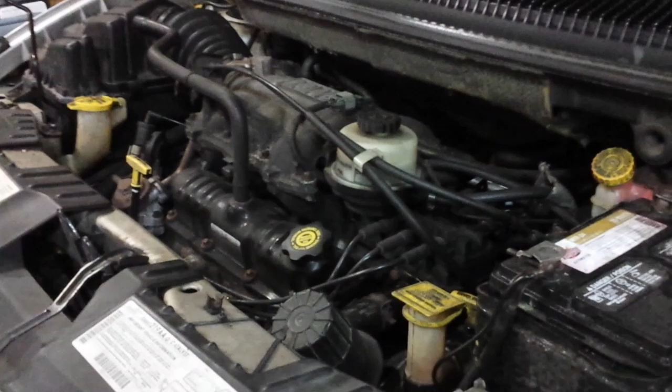Okay, so I'm having an issue with our '01 Dodge Grand Caravan, and what's going on is that there's a crank but no start, but also at the same time, when cranking, there's this noise which I'm going to go ahead and show you and let you hear what that noise is. And as of right now, I have no clue what it is.

I thought it was a starter when I used my wireless chassis ear and I put one of my sensors on the starter, and that's where I heard the noise coming from. Well, when I bought a new starter from AutoZone and put the new starter in, guess what? It's making the same noise.

So far, I've been able to verify that my first thought was maybe the flexplate might be damaged, but I checked that and didn't see any missing teeth or anything, but I'm going to recheck that again. It did rotate when I cranked the engine, so the flexplate was turning. I also verified that the drive belt, also known as the serpentine belt, was turning as well.

So what I'm going to do today is hook up my scan tool, see if there are any codes, because I believe I have two issues: the noise and the no start, the crank with no start. I'm trying to verify the noise first. That's my goal, and I may need you guys' help with this, because if I can't figure this out, maybe you guys would be able to point me in the right direction as far as what's going on. So yeah, I'm gonna hook up my scan tool, see if there are any codes.

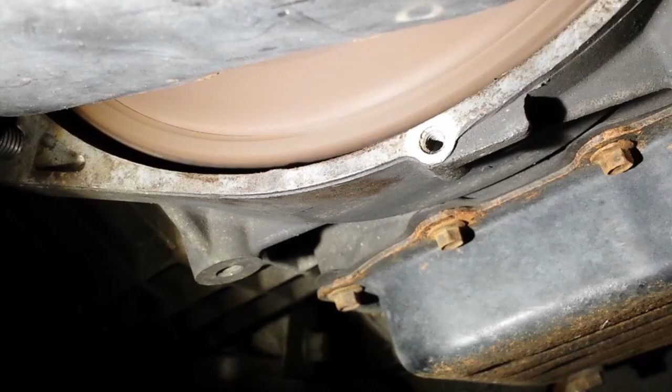Okay, so what I'm going to be doing today is I'm going to take the serpentine belt off, spin all the pulleys, see if I hear any noise from that. Then I'm also going to crank the engine manually and see if I hear any kind of noise while I'm rotating it.

Plans fail for lack of counsel, but with many advisors they succeed. Proverbs chapter 15, verse 22.

Okay, so I hooked up my scan tool and there were no codes. I took off the serpentine belt, which you can see here, and I spun all the pulleys and I didn't hear anything. All of them moved smooth and everything like that.

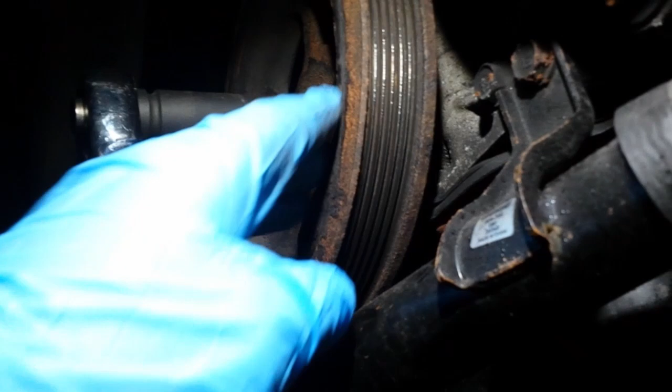But listen to this. So as you can see, I have my ratchet on the harmonic balancer bolt here. I was rotating the engine, just trying to see if I heard anything. So listen to this. Hear that? That's the chain. That is actually the chain. And I don't believe it should be sounding like that.

Listen to that. Hear that? I honestly believe I have an issue with the chain.

I mean, yeah, it's moving and everything, but the camshaft above, right, up there on the top part of the engine where the lifters are, it sounds like, see, listen to that. I think what I'm going to do is remove the oil pan, take that down, because I'll be able to see the chain from underneath there, just to verify, because that just doesn't sound right to me.

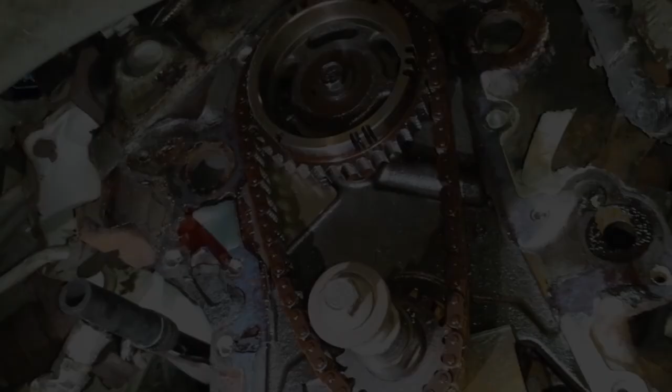Okay, so I got the timing cover off, and I confirmed that, yeah, the timing chain is stretched. Let me show you how stretched it is. Look at that. This is like almost a couple inches.

Look at that. Okay, so what was going on is that the crankshaft gear here would turn, but because there was so much slack on the chain, look, it's like that. This side is just as bad. It's not as bad, but this side is like terrible.

And I was able to confirm that by taking off the oil pan. Sorry, I was trying to film it, and then my battery ran out on my phone, so I didn't get a chance to finish filming it. So let me show you. What I did was I put the crankshaft bolt back in, and I'm going to show you what it was doing.

So you see that? Look, it's turning, but look at what it's doing. The chain, all it's doing is just going over the camshaft gear. So I believe this is what my problem was. Because the camshaft gear wasn't turning, the camshaft sensor wasn't picking up the engine rotation, and therefore it wouldn't allow the engine to start.

Now, I'm not quite sure about the noise, but this is definitely an issue here. So look at that. I'm going to go ahead and take this off, just to give you a closer look. I even saw, if you look at the teeth on there, you can see marks from the chain.

Now that could have been because when I was trying to start it, the camshaft gear wasn't turning. But I believe this has been going on for quite some time, and I kind of ignored the small signs of it, and then had this failure. What I mean is I saw metal pieces a couple times within the last year when I changed the oil, just a little bit. I was like, okay, maybe it's from somewhere in the engine, or it was already in the pan before I started draining the oil. I really didn't see it much after that.

But let me tell you, when I took the oil pan off, and the dipstick, the oil pan pickup tube, it actually had metal stuck into it, which I'm thankful there was a screen on there. I'll show it to you. It prevented all of that metal, because these were some chunks, from going around into the engine.

So yeah, I'm going to go ahead and change this out now. Compare the chain - this is an aftermarket chain, by the way, not the OEM chain. I changed this back in, I think it was 2015, and at that time it was about 170 some thousand miles on her.

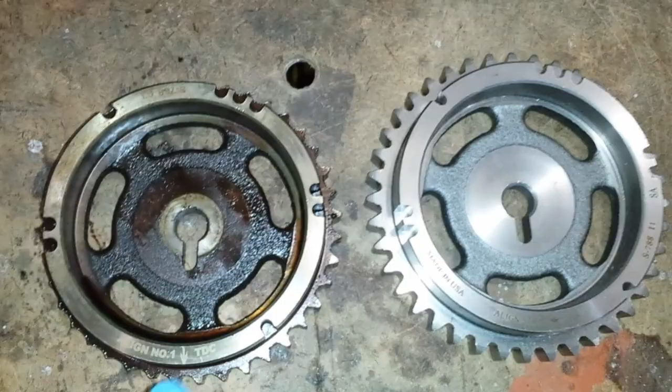So here are the camshaft gears, and you can see the difference between the two. Look at this one on top - look at how worn down the teeth are on there. Look at that. Yep, look at that. Let me see if I can get it better.

Like I said, I don't know if this worn down over time or if it happened when I was trying to start the engine, because what happened was the camshaft sensor didn't sense the camshaft turning, so it wouldn't start. But you could see, look at the way the teeth are - look at that. These are fine here, but again, I'm thinking that maybe this was the bottom where the chain wasn't on once it stopped. But I believe these teeth up here, these were wearing down, and then with the chain being stretched, it just wasn't tight enough - it was too loose. And then this is the new one.

Another thing I noticed is that this one says made in the USA right here - you probably can't see it because of my flash. This one doesn't have made in the USA on it. So I don't know if this particular metal for this was not as good.

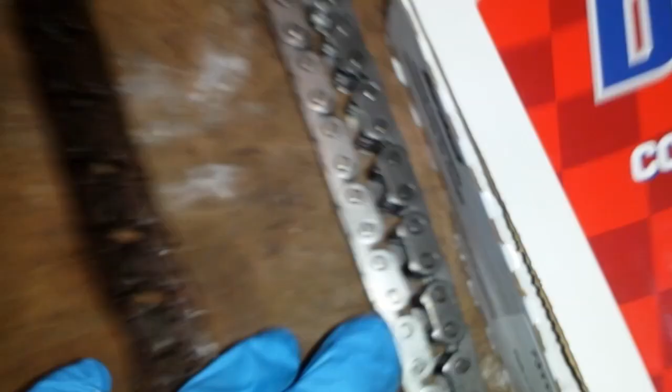The chain says it's made in the USA, and this is the new chain. As you can see, I tried to line both of them up together. It doesn't look like - they look almost the same size and length, but I'll know once I put it on.

But I believe that really the issue is the teeth on the gear. Okay, so this is the part number - got it from AutoZone, that's the part number there. And it comes with everything: the crankshaft gear, the camshaft gear, the timing chain, and also the gasket, the camshaft gasket as well.

All right, so I got the new timing chain on. Just wanted to show you this. Look at that, hardly any slack in there.

Make sure that you line up the camshaft gear, there's the arrow there, and the crankshaft gear as well. Make sure you line those both up. This one should be at 12 o'clock, and this one's at 6 o'clock. And then also there's a spot on the chain where the links are a little different, so this one here and then this one here. You'll know how to line it up because you see there's a little notch there, and there's one up there.

All right, so I'm gonna just go ahead and put everything back together and test everything out.

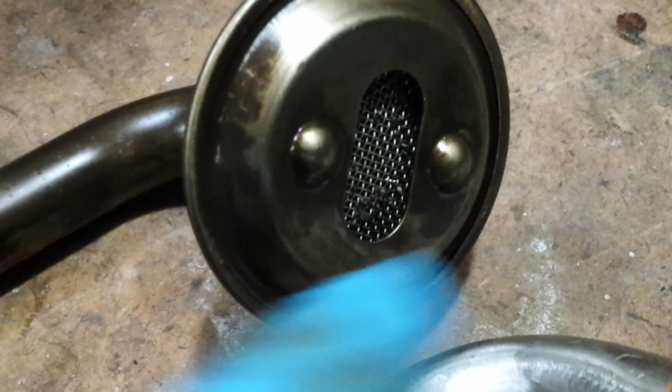Okay, so I went ahead and removed the oil pan pickup tube, this is the old one obviously, and if you look right down in there, you can see pieces of metal that are stuck in the actual screen here, and actually it was a lot more than this. So instead of, I tried to flush it out through this end here, as well as this end, with compressed air as well as brake fluid, and it got most of it out, but I'm still not comfortable with this. So I went ahead and just ordered a brand new one here.

Okay, as you can see, this is how the screen is supposed to look, and this is an OEM part. You can't really see the part number, but as you can see here, this is it. So I'm going to go ahead and install this new one here, and then let me just show you the inside of the engine from underneath.

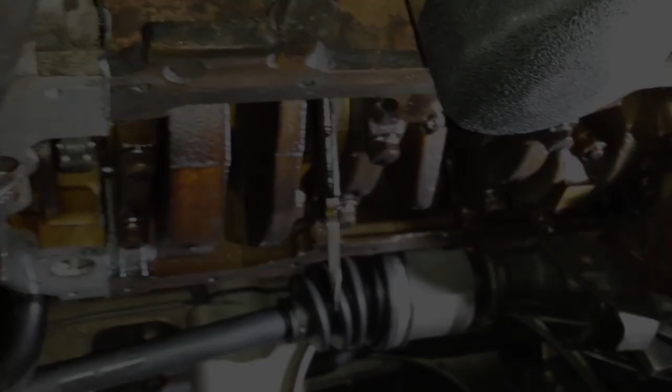Okay, so I'm facing the rear of the vehicle, and check it out, as you can see there's a timing chain, there's a new one that I just put on. So if you ever need to verify again if this is loose or not, just remove the oil pan. That is the simplest and easiest thing that you can do, because that only takes maybe 30 minutes or so compared to taking everything off, the timing chain cover and everything attached to it, to verify that, because you can see all the way up in there on both sides, and you can check it with a long screwdriver as far as if it's loose or not.

But yeah, so this is what our engine looks like at over 300,000 miles. There's some varnish on there and everything, but outside of that, to me it looks really good. You guys can comment and let me know what you think. But yeah, it looks really good. Like I said, we've been running fully synthetic oil since 171,000 miles and everything. So yeah, I just wanted to kind of show this to you.

So I'm going to go ahead. I've already cleaned the surface here on the engine block as well as the oil pan itself. I'm going to go ahead and install it, and then I'm going to go ahead and see if that fixed my problem.

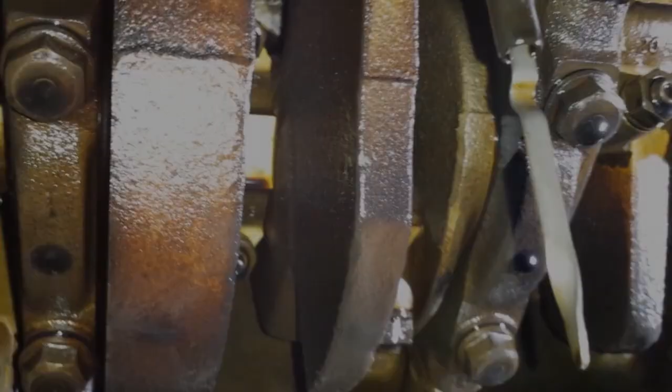Alright, so here's an update. The noise is still there. As a matter of fact, the symptoms have not changed, even with doing all of that work, which is really kind of blowing my mind. I really am clueless as to what is causing the problem. I'm just kind of dumbfounded. So what I'm gonna do is I'm gonna just do a few tests, little simple tests.

I did this before, but I'm gonna do it again. So I've got my battery tester here, let me see if you could see it there. So I'm gonna go ahead and show you the charge on the battery. Now, I did do the... what was I about to say? Oh, I lost my train of thought. Okay, well, I'm gonna go ahead and do this.

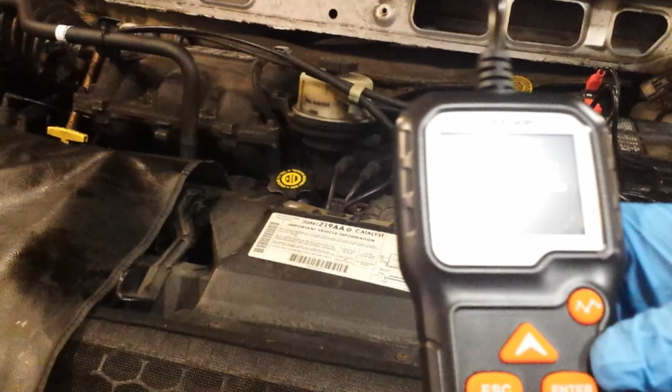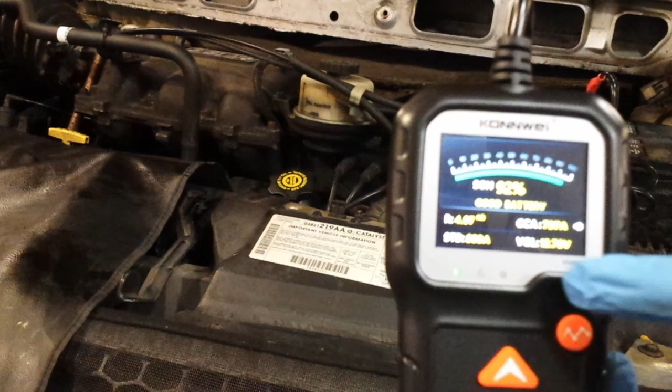Oh, I charged the battery. I had charged it before I did my work, after I was finished with all the repairs, before I tried to start it up and everything. So the battery, I think it was about 12.7 volts or something like that, which isn't an issue or a problem or anything. But I did crank it over like 4 times, so the battery may have gone down some. Not necessarily to the point whereas it shouldn't start, but I just want to test it anyway. Okay, so yeah, as you can see here, it's got 12.7 volts. The cold cranking amp is 737 amps, and it's at 92%. So the battery is actually good.

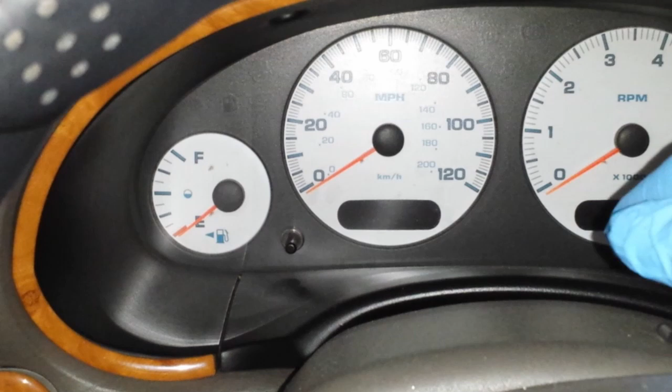Okay, so now I'm going to crank her over. I'm doing 2 things with this. One, I want you to see the RPM while I'm cranking the engine. The RPMs are actually moving, which I believe indicates the camshaft sensor is working and the camshaft is rotating. But also listen to the fuel pump prime, which you may not hear on the video. So I'm going to do that first. Okay, so I heard it prime.

This code here, this is the only code that popped up, and basically that's just that the battery was unplugged. So observe. So you see it? And you probably heard it too.

Okay, so what I'm going to do is test for fuel pressure, as well as test for, what else was I going to test for? Oh yeah, and I'm going to test for spark. All right, so I got everything all set up. Got my fuel pressure gauge set here. The specs for the fuel pressure should be around 49 psi, and then I have my spark plug right here. I'm not sure if you're going to be able to see it. I clipped it over here because I didn't want it falling over or landing on the engine, since it can cause a fire, and also because the spark can ignite something. So I'm going to crank the engine over and see what the readings are.

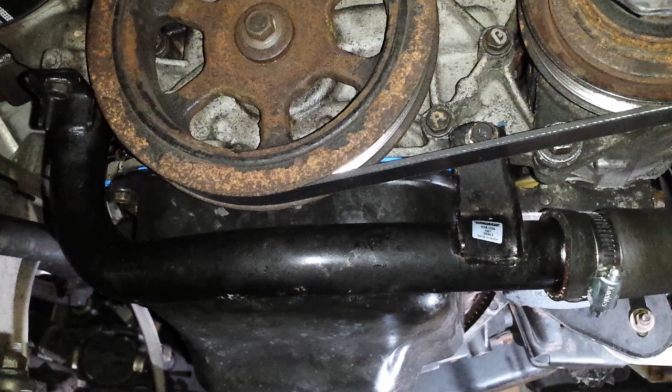All right, so what I'm going to do is just show you that the engine is cranking. So pay attention to the flywheel, which is kind of over there. You're going to see that rotate, and then the pulley here.

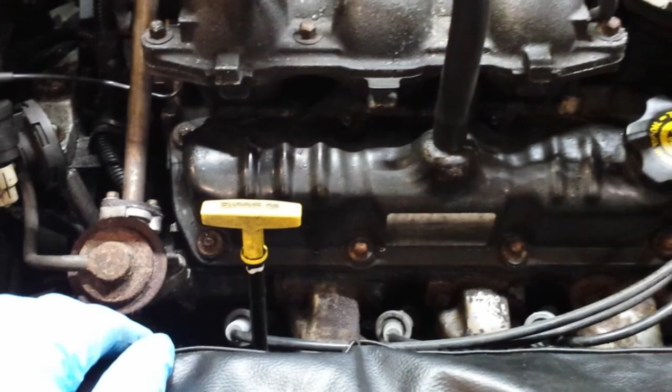All right, so after doing some thinking and research, I've got a couple more things I'm going to verify. The first thing, though, is I wanted to let you know that I did confirm I am getting spark. I didn't ground the spark plug that I was using to test with, that's why there was no spark. So I redid that test. I didn't show it, but I am getting spark.

Okay, so what I'm going to do is remove all 6 of the spark plugs, and I'm going to use a borescope to look inside to check the piston as well as the intake and exhaust valves, to see if they're damaged. Because what I found out, which I didn't know, is I actually had the wrong information. I thought this particular engine, the 3.8 liter V6, was a non-interference engine, which is why I didn't suspect valve crashing.

So basically what I think actually happened is the valves got bent. I don't know how many or how much damage was done, but I'm about positive that's what it is. The reason why is because when that camshaft gear's teeth wore off, the crankshaft was still turning, which means both were out of time. And when it's out of time, in an interference engine, there's a possibility of getting bent valves. So I'm going to peek inside each one of those.

I'm not going to record it live, but I'll show you here, this is my borescope that I'm going to be using. It has where I can record it, so what I'll do is play it back after I view all of the cylinders and the intake and exhaust valves, and see what's going on.

I'm also going to be using compressed air. I'm going to do a leak down test. I'm going to hook up my air hose to this here. I'm going to pressurize each cylinder to about 80 psi, maybe 100 psi, and see if it holds pressure. So these are just a couple things I'm going to be testing out, and I'll report back.

Oh yeah, also this borescope only has one camera, but it has a mirror on it that lets you see at a 45-degree angle. So I'm hoping I'll be able to look at both valves in each cylinder doing that. Alright, so here's an update. I went ahead and checked cylinders 1, 4, and 6, trying to take a look at the valves, and it was really hard to see with my camera.

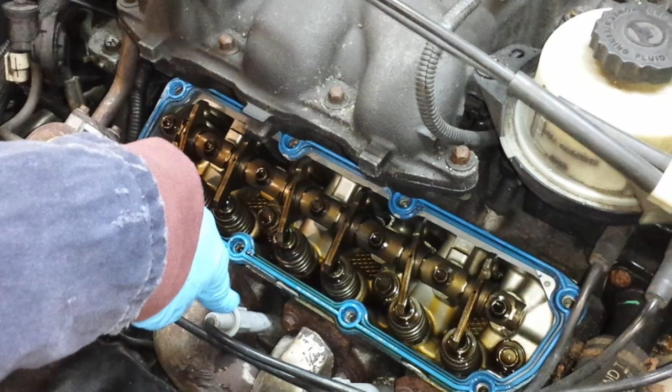I could see one valve in cylinder 1, I was able to see both of them, but because of the angle of my camera, it was really hard to tell if they were damaged or not. That was pretty much the same for the rest of them, I was only able to see just one valve. I know both are in there, but I couldn't see the details.

So the other thing I did was top dead center on each one, and I tried compressed air, and the air just shot through. It never went above 40 or 50, and it was not holding compression. So I know there's a problem with the valves.

I can't tell if they're bent just from taking the valve cover off and looking at the rocker arms. But what I wanted to do is crank the engine over to see how the rocker arms move and see if all of the valves are moving, because I'm trying to minimize tearing stuff apart and troubleshoot before I start replacing valves and find out that's not the issue.

So that's what I'm about to do now. I'm going to crank it over and see, because all of these should move. Yeah, all of them should move. Alright, so check this out.

After inspecting everything closely, the valves, the rocker arms, which I can't see the seats of under here yet, I'm going to remove the rocker arm assembly and then the push rods. Look at what I found.

And it's bent on each of the cylinders. See? Look at that, this one's even worse. And this is on cylinder 6.

In order to check these out, I'm going to remove all of these bolts here, take the rocker arm shaft off, and then I'll be able to pull the rods out. I'm hoping this is the only problem, and it's like that on the rear valve cover too.

I decided I'm going to just replace all of them. Now the only downside is the only way I'm going to know that this is actually the issue is by putting everything back together and trying to start it.

The other thing I want to take a look at is using my bore scope camera to look down in each one of these holes to see where the push rods seat - I can't think of the name of it - I'll put it in the video to see if they're damaged in any way.

Go ahead and remove the right side valve cover, which is the back part of the engine. Looking at the push rods there, it looks like there's a couple that are bent. It's really hard for me to tell, only because of the angle, and there's not a lot of space back here like there is on the front.

So what I'm going to do is replace all of the rods, a total of 12, and hope that fixes my problem. I want to go that route because it's the simplest and easiest thing to do, instead of taking all this off and removing the head, and then I can just test it after I'm done, because that'll be real simple.

And I believe I should be able to replace these without having to remove each valve. So what I can do is compress the spring, so that takes the pressure off, and then just take it out. So that's my plan. I'll come back when I start working on it and let you know how it goes.

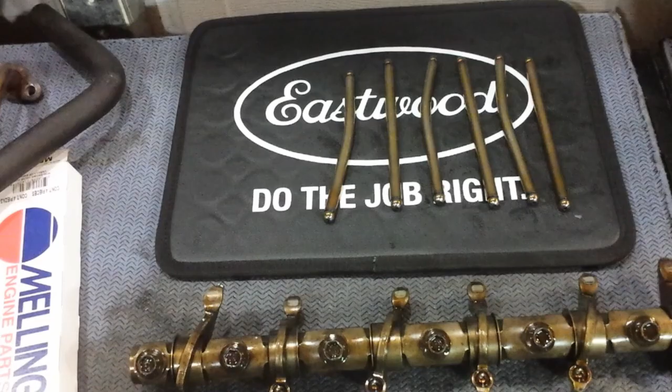All right, so I went ahead and removed the push rods, and as you can see, this is from cylinder 2, 4, and 6. And, you know, again, these are the exhaust rods. And look how bent they are.

The other ones look like they're pretty straight. And what I did was I compared them. This is a brand new one. So yeah, they look pretty straight. But you know what? I'm going to change all of them out anyway since I have them. But yeah, look at how damaged they are.

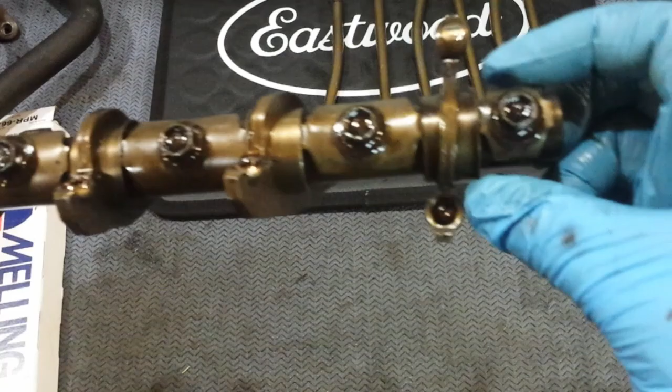Now, as far as the rocker arm shaft, these seem to be in good shape. The shaft and the rocker arm seem to be in pretty good shape. So you have the part where the top of the push rod goes into, and then the other end goes down on the other part that connects to the camshaft. So all of these are fine, see, they move freely.

What I did notice though is this one is from cylinder 2. It's like really hard to turn. So I think this one got damaged. And even when I remove this piece here, this is the rocker arm for the exhaust valve, see how freely it moves? Look at that. But look at this one, you see it? It doesn't move freely. So I'm going to order another one of these so I can replace it.

And then I'm going to check each cylinder, see if, with the valves being all the way closed because of the tension on the springs, they should be closed and sealed up, and that'll at least let me know that the valves aren't bent.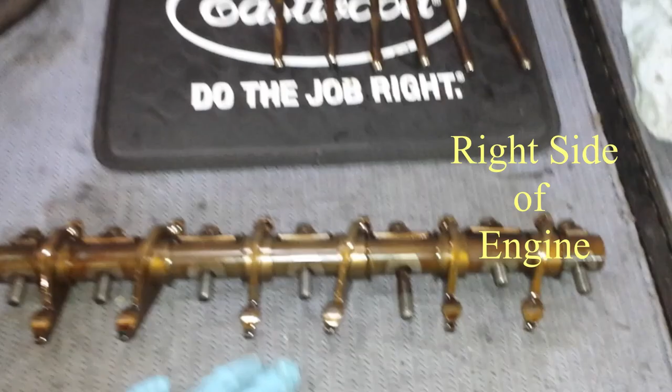So I'm going to go ahead and do the same check on all the other 5 cylinders, and see what happens. So I went ahead, removed the rocker arm shaft, and everything on here is fine. All of the rocker arms move freely, no problem there. And there's the push rods, and actually on this one there's actually a few more push rods that were damaged. Really, it's only this one here and this one here that didn't get bent, as you can see.

So I went ahead and did a compression test on cylinder number 5, and the air just went through. So yeah, the valves are bent on the right side of the engine too. So the only way to fix that is to remove the heads, both heads off of the engine, and replace the valves.

What a bummer. Okay, so I got the left head off, and as you can see here, not too bad for an engine that's got over 300,000 miles on it. There's some carbon buildup, not a lot. It's not a real thick coating on the cylinders there, and the walls on the inside look pretty shiny too.

But yeah, I confirmed that the valves actually hit the piston. You can look at the indentation right here, and it's pretty much in the same spot on each one. So this is cylinder 2, this is cylinder 4, and then this is cylinder 6. So it doesn't look like the pistons got damaged or anything.

I'm going to clean all this up. I'm also going to check these hydraulic lifters too. I'm going to pull those out, test and make sure that they're okay. I believe they are, but since I got all this apart, hey, I might as well just go ahead and check everything.

And this is the right side of the engine, the cylinder block, and there is the intake for cylinder, I think this is 5. And as you can see down in there, you can see that one's open too. Same thing with this one here. This is cylinder 1, and that one looks like it's a little open. Maybe this one might be closed.

And this one, it looks like it's open as well. So I'm gonna do the back side later after I do the front. I want to do the front first because it was easier access, and this way I can work out any kind of issues that I had.

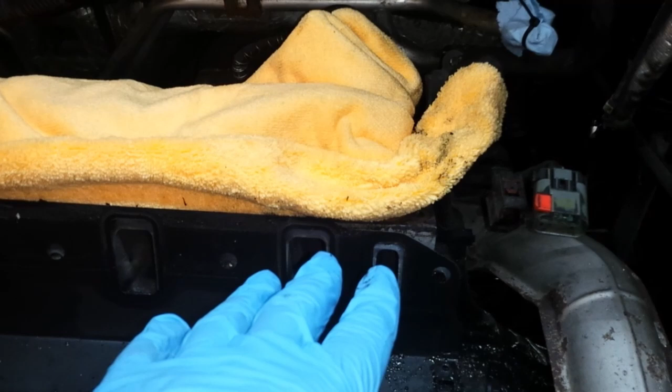Oh, just wanted to show you this too. I left the crossover pipe in here because I'm really not trying to remove this thing. I'm hoping that for the back head I can actually just unbolt the exhaust manifold from it and then just lift it out.

Okay, so here's the head here. So this is the exhaust valve, and as you can see it's open, and it even looks bent. And this is the intake here, and it's like that on each cylinder, and this was really bad here.

So yep, I'm gonna be changing all these out, and I'm going to test the springs to make sure that they're up to spec, because I may have to change those out too as well. All right, when I come back I'll update you. It'll probably be on the back part back there if there's anything.

So it's amazing, this damage came just by cranking the engine over. Ain't that something? But you know what, it could have been worse though.

Oh yeah, and here, these are the head bolts, which they all look really good as far as the threads. Look at that, not all of them are the same. This is the one on the bottom, this is the one that's on the outer parts. That's why the head's rusted. But when you look at this one, this is from inside the head. Look how nice that looks.

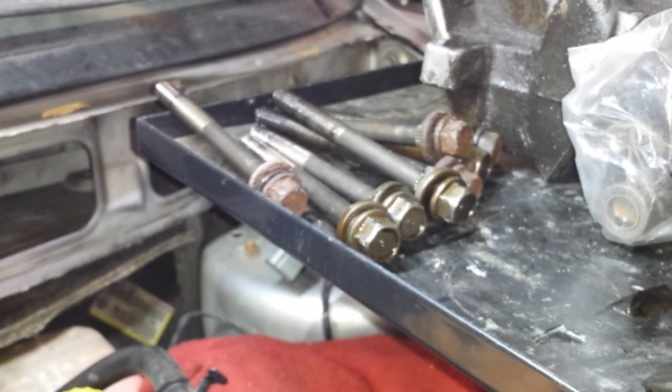But I'm going to be replacing these with new bolts because the owner's manual or the repair manual says to do that. All right, let me get to work. Yeah, I'm going to have to clean this all up. Oh yeah, and another thing, let me show you this.

So in case you ever decide to do this, it's not necessary to remove the fuel rail. You can if you want to. I choose not to because I've removed this thing a few times already and replaced the seals. I already have more seals in case I had to do it. But all I did was disconnect the wire here and just pulled the whole thing out. You just got to be careful when you're cleaning it and moving it around.

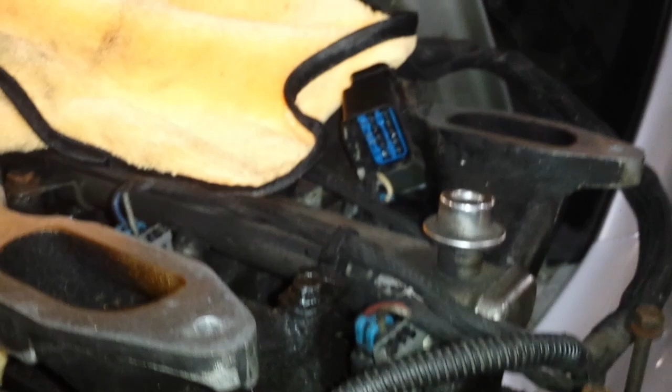And also, it does have fuel in it, so make sure you cap it, drain this out into an approved fuel container, and then put a cap on the end of it.

Okay, so I am all finished. So these are the new valves here. I went ahead and cleaned those because I don't want to put dirty parts into the head.

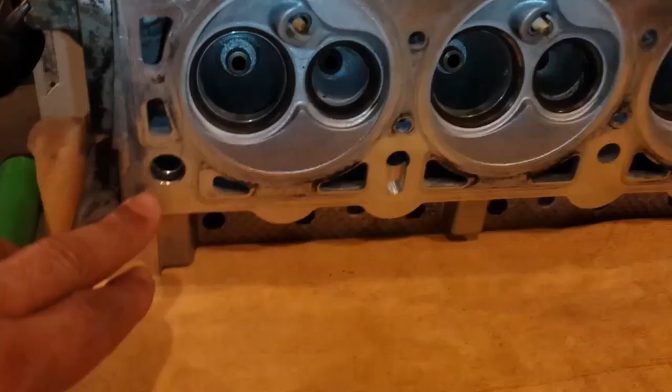And then, hey, check out the head. It turned out real nice. Look how clean it is. Sorry, my flash turned off. Look how clean it is, it looks really nice.

Literally got all the dirt and oil and everything off of it, and even the varnish on the inside. It really looks like almost a brand new head.

So I did go ahead and remove the valve stem seals, which I'm gonna put the new ones on there. I also used compressed air to kind of dry out the passages. Here's the rocker arm assembly, I went ahead and cleaned that as well, as well as all of the springs and the keepers and stuff like that.

These gaskets here, these are for the valve cover. And this is the cleaner that I use. This cleaner works really nice, especially because of the fact this is aluminum. And from what I read online, there are certain cleaners you just can't use on aluminum because it'll damage it. Well, this oil eater here, this is actually safe to use on aluminum.

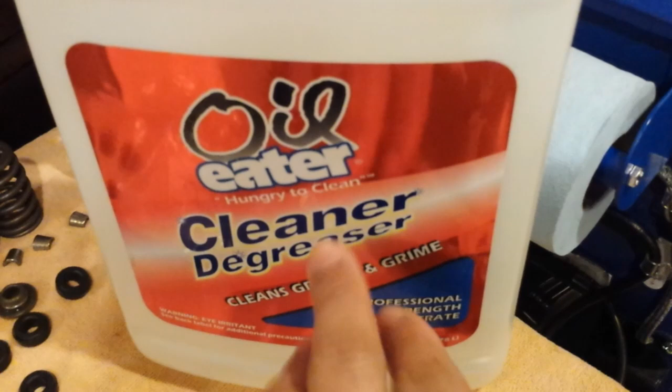Now, obviously, I wouldn't soak my parts in it, but definitely for cleaning, then just make sure you hose it off with water. The mix ratio for this is 3 gallons of water to 1 gallon of cleaning solution. The mixture I used was 5 gallons of water and 2 gallons of cleaner. And like I said, it worked out real good.

You can see here the water is really dirty, but it's still good, still making bubbles and everything, and it's still cleaning, so I don't have to worry about changing it out. Another tip: make sure the temperature is around 100 degrees, because it actually helps with the effectiveness as far as cleaning. And this is my heater here, and this thing works really good.

So when I come back, I'm going to have this head all put together, and I'm going to set it to the side. Then I'm going to remove the right cylinder head off the engine and do the same process.

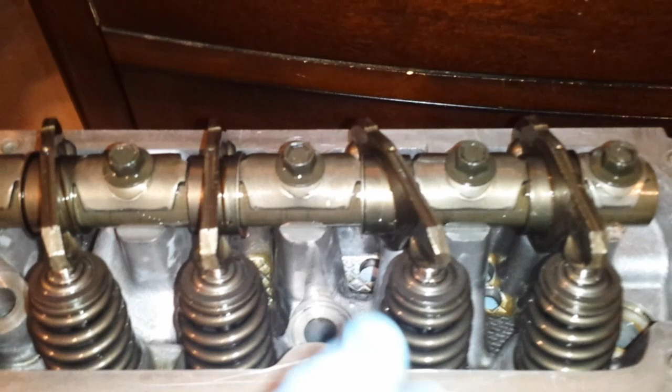Okay, so I went on ahead and put everything back together in the cylinder head. Everything's been oiled, and just make sure these little spacers are in the correct spot, because if they're not, it's going to throw off where the actual rocker arm touches the top of the valve. It also has an oil hole right in the middle of each one of these rocker arms.

And then here are the old valves, and as you can see, pretty much every last one of them are bent. Remember the rocker arm I showed you that was hard to twist? Well, after examining it, look at that. It's got a crack. Let me zoom in. It's got a crack right there. This is made out of steel, not aluminum. See that crack? That little crack right there.

The force of the piston when it hit the push rod cracked it. Look at that. So I did check all of the other rocker arms, and the rest of them are just fine.

Okay, so this is the right side cylinder head. I already removed the rocker arm assembly over here, and these valves are bent just as bad as the left cylinder head. So check it out.

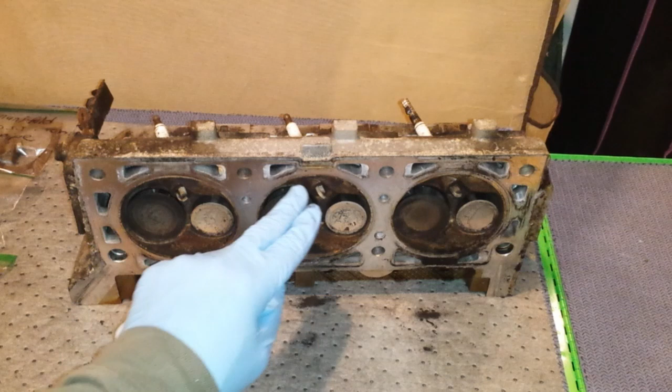Look at that. See the space? Look at that. I can get my finger up in there. All of them are bent. So I'm going to go ahead and remove these out of here. I'm going to prep this so that I can clean it in my parts washer.

Okay, so I've got the head prepped, removed all of the valves on here, the valve stems. All right, so just to give you an idea, let me move this head out of the way. See how bent they are? So these are the air intake valves, and these are the exhaust valves. You see they should be standing straight up.

So when I come back, I'm going to go ahead and put this inside of the parts washer, and I'm going to clean it up.

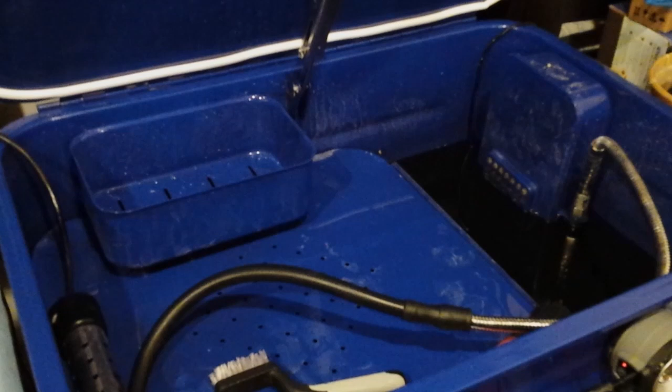Okay, so I am all done cleaning my parts, and the parts washer worked really good. I've already cleaned off everything and rinsed everything off so that it'll be ready for me next time. And I'm charging my light here.

And check out the parts from the parts cleaner. Everything looked great. Look at the head. Check that out. Look at that, it cleaned it. That cleaner worked really well, and it only took about 30 minutes to do this.

So this is the left side of the engine, and as you can see, I went ahead and cleaned all of the cylinders, and made sure I applied some motor oil on a clean shop rag on the inside of each cylinder, as well as on top of the cylinder head and the mating surface here, just to prevent rust and everything. So when it's time for me to put the gasket on the cylinder head, I'm going to just wipe this part down with brake cleaner.

And this spot right here was just a stubborn little spot. I'm going to try to get this off again, but if you look closely, you can see the impact from the valve, and you can see it on the cylinder there. You see that?

Yeah, these are the hydraulic lifters too, and like I said, you just take off these 10mm bolts here, lift this bracket up, and then you'll be able to lift these out. So make sure you check those.

And then here is the right side. I just removed the cylinder head off of this one, and as you can see here, it's not bad at all for over 300,000 miles on it. And here, let me grab my scraper. Oh yeah, and I used a plastic scraper to clean all of this.

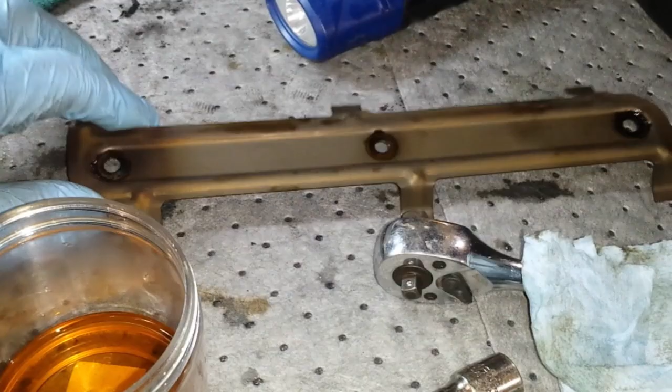As you can see, I removed the retaining plate off of the hydraulic lifters, and these are the alignment yokes here. So it's just real easy, you don't need any special tool to remove them. Just do one section at a time, don't try to take everything out all at once.

From what I noticed, these have numbers on them. Let me see if I can see. This one looks like it has number 9 or 6 on it. So I don't know if the numbers mean anything, but just make sure you put it back in the same spot.

Basically all you got to do is check to make sure that they rotate freely. So you see how I'm turning it clockwise and counterclockwise real easy with minimal resistance, and it should lift up and down easily.

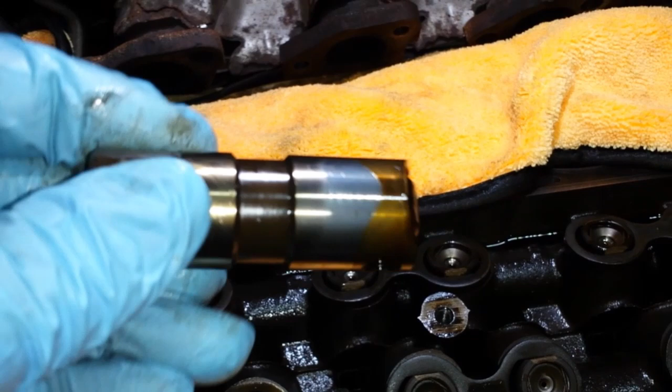Okay, and then the other thing you want to do is check the roller there. Let's see if I can focus here. Yeah, it should roll freely on that, because this is the part that contacts the actual camshaft as it's rotating. So check that, wipe this off, look to make sure there are no cracks or any damage to it, and then recoat it with some fresh oil, and then place it back.

Also, another thing on here, let me just show you this. This is an oil hole here, so you want to make sure that it's facing the correct way, which is towards the center of the engine. If you notice, there's like this discoloration here at the top, you see how that is? So it's going to be facing towards that side of the engine when you place it back in.

Okay, so I'm all done cleaning the cylinder block, all the piston heads, as well as the sealing surfaces here, so everything is smooth. It's a little discolored, but it's still smooth, and that's all that matters. So it turned out really well.

So what I'm going to be doing next, I'll be bringing the cylinder heads out from in the basement, and then I'm going to go ahead, put the gaskets on, and go ahead and bolt those down, and I'll be on my way back to putting everything back together.

Also, you want to make sure you use compressed air to blow out the holes for the head bolts. What I did was I used my shop vac at the same time while I was blowing compressed air inside of each hole. That way the stuff that came out of the hole wouldn't go everywhere, it'll get sucked up in the vacuum.

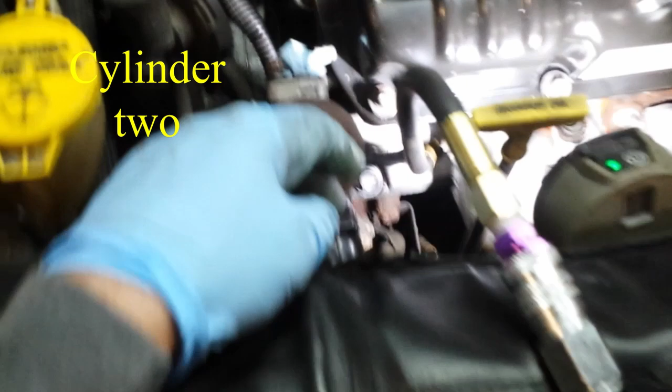Okay, so I've installed the lower intake manifold as well as both cylinder heads, no problems at all. So now I'm just doing a leak down test on the last cylinder, which is cylinder 2, which is what you can see right here. I've already tested the other 5 and they were just fine. I didn't want to show you that, but I figured I'll show you this one here.

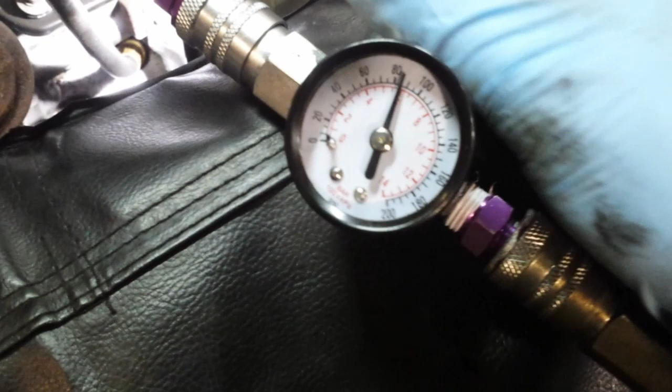So pay attention to the gauge here. I'm going to bring it up to about 80 psi and hope that the piston doesn't go and push down. Alright, so there you go. So yeah, you hear a little bit of air coming out, but that's normal. Even before this incident happened, it was kind of doing the same thing.

So right now everything is going along pretty good. So when I come back, I'll pretty much have everything together, the plenum, and then I'm going to go ahead and attempt to start up for the first time since doing this repair, and hoping that that actually fixed my problem.

Alright, so what I'm about to do now is I'm going to show you the compression test and the results.

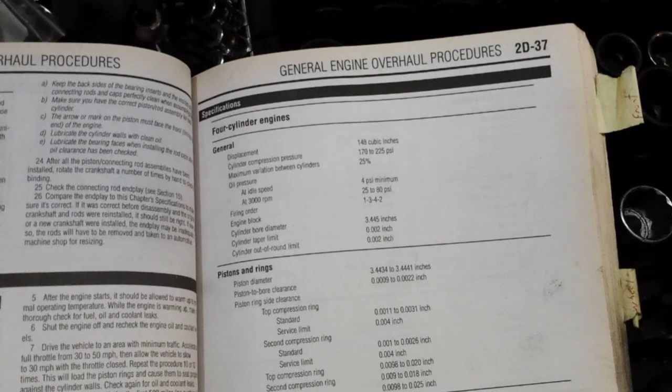I've actually already done all of the cylinders and they were all within spec, but I had forgotten to record at least one of the times when I did it, so I figured I'd go ahead and record doing one so that you can see it for yourself.

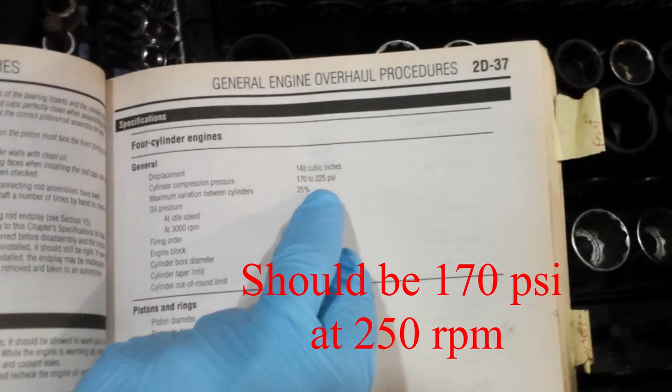As you can see right here, according to the repair manual, the cylinder compression pressure should be between 170 to 225 psi.

Before I actually do this, there are a few things I have to do to the engine to make sure this is done successfully. The first thing is to remove all the spark plugs.

So I did that, and as you can see, all 4 spark plugs are here. These are the old spark plugs. I do have a new set that I'm going to put in after I'm able to confirm that the engine starts, as well as new spark plug wires.

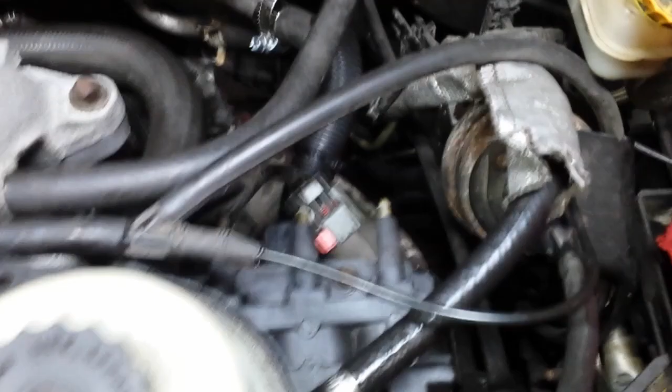Then the other thing you've got to do is disconnect the ignition system, which is this cable right here. This connects to the ignition coil pack. Just disconnect this, and that way spark won't be coming out of there. And of course, in my case, it's not—I definitely don't want that, because I don't have the cables on the actual coil here.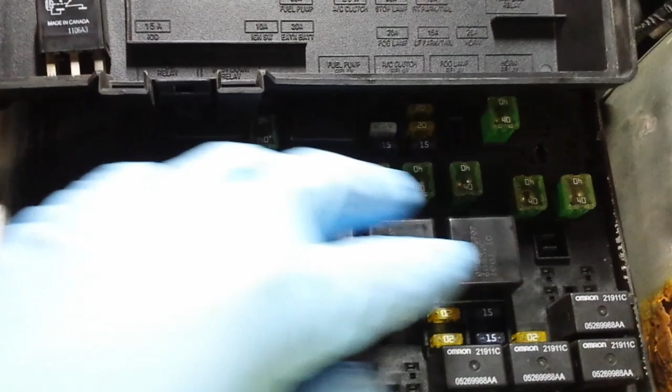The last thing you want to do is disable the fuel system. If you look in here, you see the layout of all the fuses and relays for the entire vehicle. Right here is the fuel pump relay, which I already pulled, and it came from this location right here. This layout is exactly the way it's laid out down here, so it's pretty easy to find everything.

Now, a few things I wanted to let you know about this particular compression test. The first thing is when I did it the first time, this vent hose here, I actually forgot to install, and I had it capped off with a rubber cap, so this side of the engine couldn't really breathe. I don't know if that may have affected the pressures or not.

The other thing is I did it without the system being filled with coolant. The reason is I ended up breaking the coolant sensor and needed to change that. That took me a day to get the part, and I really wanted to get the test done, so I didn't see any issue doing a compression test without coolant, since there was no heat generation or anything like that. But it's full now because I already changed the sensor, and there's engine oil in it both times I'm doing this test.

The other thing is this is going to be a dry test. It's been maybe 3 days since I did it last, and that time I put some oil in the cylinder. This time I'm not doing that—I'm just showing you the pressures basically before I actually start the engine.

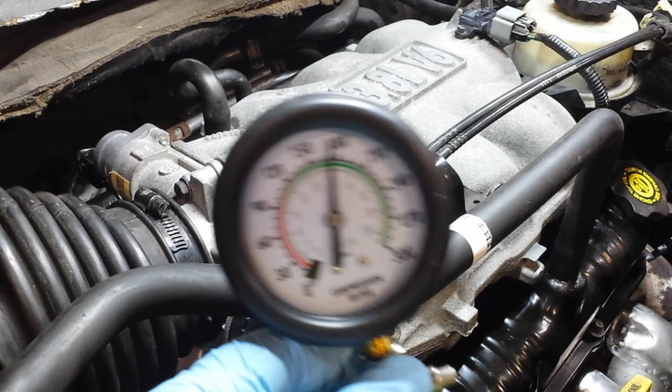Okay, so you see the pressure is about 160. Let me try one more time. Okay, so it's about maybe 172, which is within spec for it.

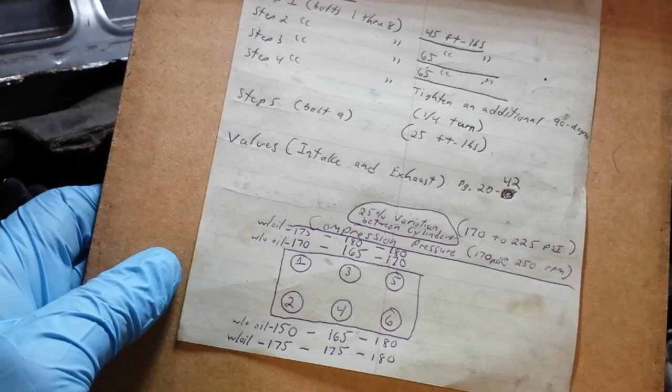The other thing that's kind of a concern for me is you heard the noise when I was cranking it, and that noise is still there, and I have no clue what that is. I'm hoping the engine starts, and then maybe I can pinpoint where it is, but I have no idea. That's kind of concerning for me, but let me try to start the engine and see what's going on—if it'll start and if the noise is still there.

So down here, these are all my notes. Cylinders 1, 3, and 5—these are the numbers without oil, basically dry. And then once I added oil, these are the numbers there. Again, these numbers may not be accurate because the engine hasn't been run in almost 4 months, so there's no oil pressure, and the engine hasn't been heated.

From what I read online, they say you get the best results when the engine is warm, so I may just go ahead and do this test again once I get the engine running. Let me go ahead and put the spark plugs in and the wires and attempt to start her.

Okay, the moment of truth. Got the spark plugs in, got the wires hooked up, the ignition system is all connected. The first thing I'm going to do is prime the fuel line because with me emptying out the fuel rail, it's literally empty. So I'm going to cycle the key to the on position, start on like 3 times to fill the fuel rail up before I actually crank to start. All right, let's see what happens.

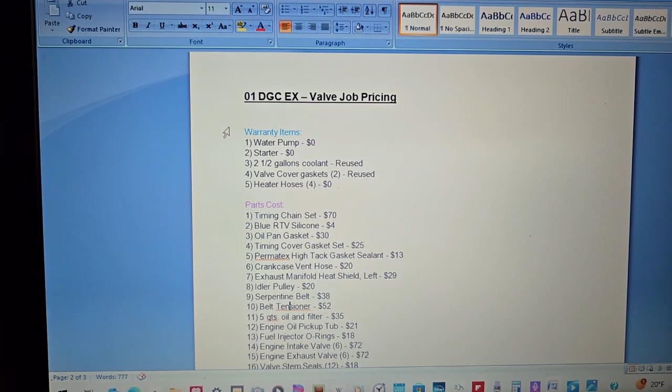Here is a listing of literally all of the parts that I end up replacing. I do believe that I got everything. If I happen to have forgotten something, you can just post them in the comments.

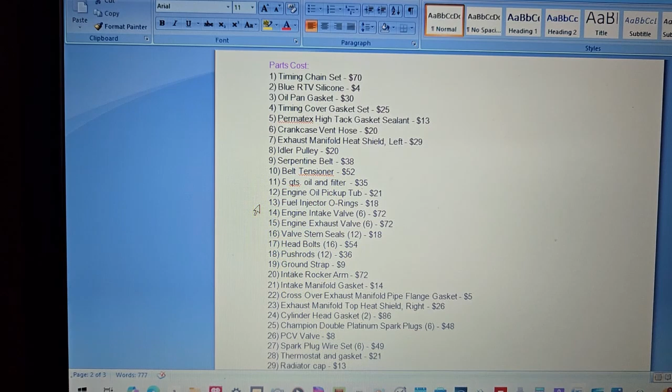These are the 5 items up here that were basically warranty items that didn't cost anything to replace. And then down here, these are all of the parts. So what you can do is pause the video, take a look, take notes. And if you have any questions, post them in the comments and I'll get back to you. I did my best trying to list everything, no particular order.

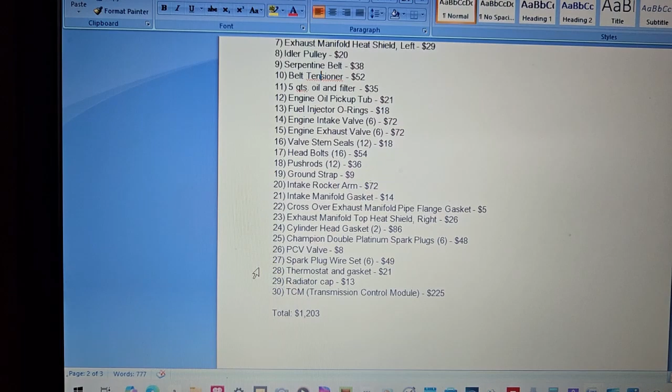As well as how much we paid for each part based off of our receipts. So even with everything I did, which was 30 different parts, I didn't realize it was that many when I was pulling this up. It still only came out to a little over $1,200, which isn't bad at all, especially for all of these different parts that I end up replacing.

So it was definitely worth the money to invest in doing this repair. Alright guys, so here are my final thoughts in regards to this repair. Everything was a success. I haven't had any issues or anything since completing all the repairs, even the repairs of things that failed after the initial crank and no start repair.

But once I prayed about it, I took some time out to think, do research, and just using my over 30 years experience and knowledge of working on vehicles and how different components work and everything like that, that really helped me out a lot. And also I have a whole slew of tools that I've collected over those 30 years. I think the only two tools I had to buy were the parts washer and a C-clamp valve spring removal tool, which both basically pay for themselves just with this repair.

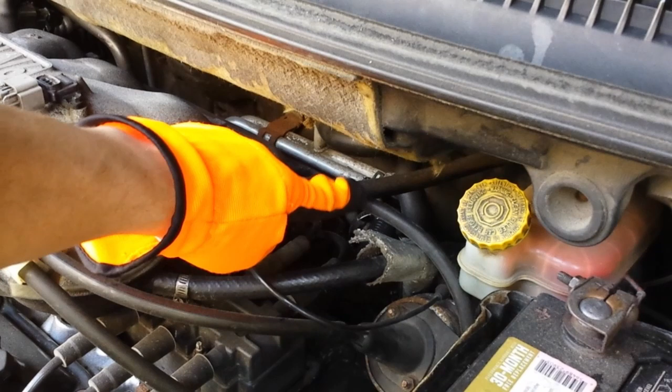Alright, so one of the issues that came up after the repairs were all done are these rear heater hoses right back here. There's a total of 4 of them, and what ended up happening was one of the hoses started leaking. I think these hoses are about maybe 15 years old. So they've been changed once, but not since - that was probably back in 2005, 2007, something like that. I always had plans to change them, but the reason I didn't was the location of them - you literally have to remove the wiper cowl in order to do it. Anytime I had this out doing other repairs, I didn't feel like dealing with those.

So what I ended up doing, there's a total of 4 of them back there. I ended up changing all of those out. Just not the one that was leaking, but I changed all of them. So that fixed the coolant leak.

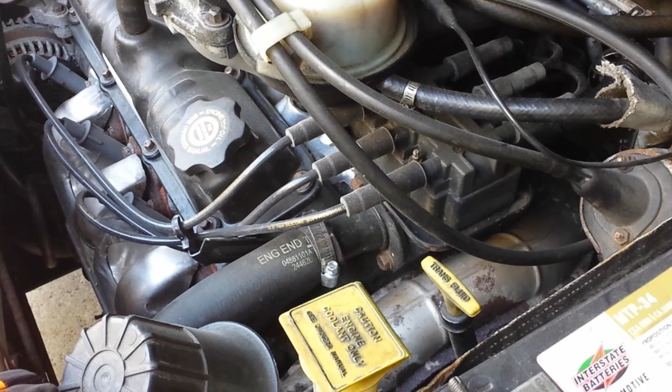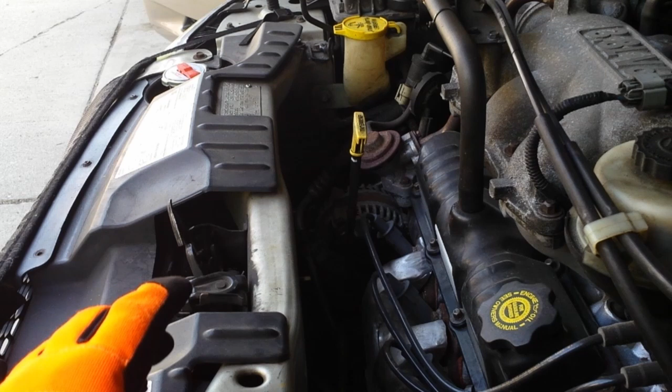Then another issue that came up was the thermostat stuck in the open position. When I was doing the repair, it was still winter, roughly around 30 degrees outside. When I was burping the system with the radiator cap open, which is right over there, I noticed that when the coolant fans turned on, the coolant was still flowing through the radiator and it didn't stop. This was going on for like a couple of minutes.

After doing a test drive, I did notice that the coolant wasn't getting up to temperature of around 200 degrees, which is what the thermostat is rated for, I believe it was 195 degrees. So I did have heat, but when doing anything over 50 miles an hour, the temp gauge didn't really get past the first notch on the temp gauge, which I'll show you. So I ended up changing that out and that fixed the problem.

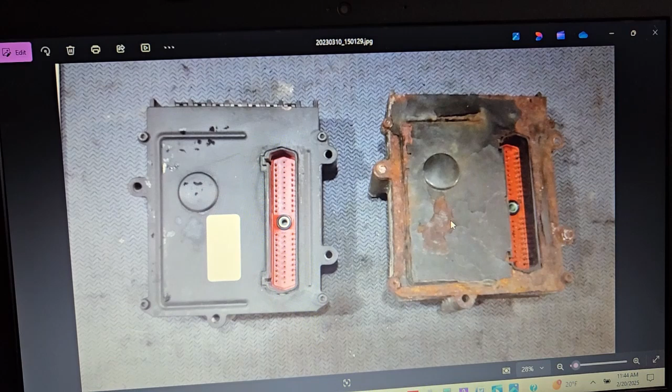Another issue that popped up was the TCM. There were a couple of codes for non-communication with the TCM. I don't remember the codes offhand, I'll put them up in the video because I had to diagnose it to figure out exactly what was going on. And as you can see here...

This is the old one here. As you can see, it's all rusted and everything like that, really corroded. As a matter of fact, the rust actually went all the way through the metal to the internal components of the TCM, which is what I suspect caused the problem, because it allowed moisture to get inside where the electronics were. And as you can see here, this is the new one that I ended up replacing it with. It wasn't a hard job, I think it took more time to diagnose this than it did to actually replace the part.

I did have them encode this with the VIN for our vehicle from the place that I bought it from. Here's the side view of the TCM, and as you can see, look at that, look at how rusted. So yeah, just by it sitting there, me heating up the garage and it cooling off again and everything like that, it just totally messed us up, because there was no issue with the TCM before I started the repair.

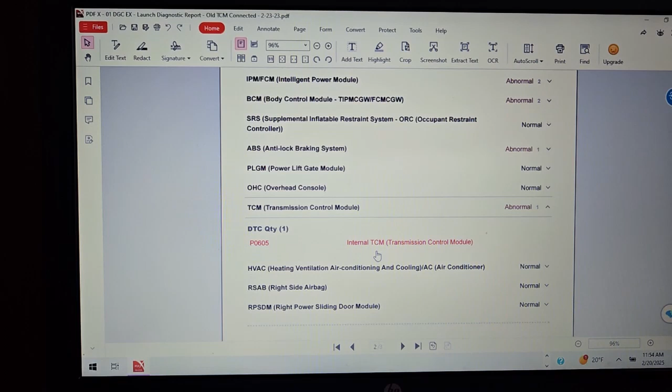And then I scroll further down, and the code was a P0605, which was an internal TCM, basically a failure. So basically what I think happened was, after I did all my testing on the TCM, the internals from the corrosion allowed moisture to get in, and it messed up the electronic components within the TCM. So me ordering a new TCM and having it programmed with our vehicle's VIN, it was basically plug and play. Really the only thing I had to do was a relearn.